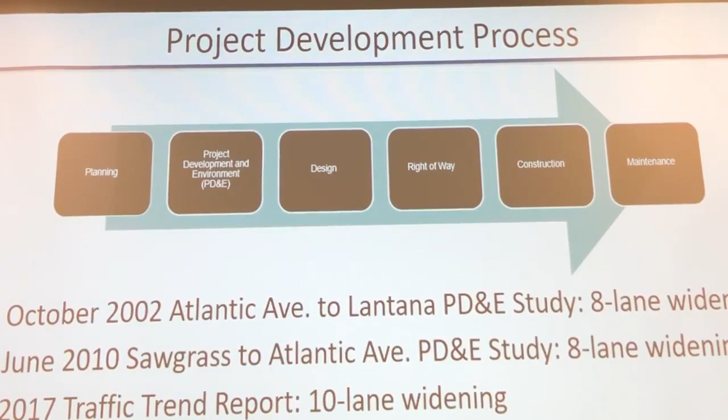And so we look at... Go in the corner. Everybody good? Does she need a chair? She's gonna sit, I'll sit on there. Right around. All right, there we go. All right, fantastic. All right.

So we start from a planning standpoint, looking at the needs that are out there and just even determining the feasibility of whether or not a project should go forth or not. Does it make sense or not? So there's different elements and components of that. Once the decision is made that we do think that this is an improvement that we do need to look at,

then we go to the next step, which is the project development and environmental process, which is a study that's actually done, and it's often titled PD&E. And some of you may have heard that terminology and not really understood what it means. So we're talking about developing the project and also looking at how is it going to impact the environment and how do we need to mitigate those impacts.

And there's a public involvement process during that PD&E study where we meet with stakeholders such as yourself, we talk about what we're considering, and then at the end of that come up with a preferred alternative. So this is what we're recommending that we want to build. So for the projects that we're going to discuss tonight, that process has actually already taken place.

And there's been 2 PD&E studies, one that was done in October, and that one was from Atlantic Avenue to Lantana, and that was actually for an 8-lane widening. And then in June of 2010, we did a study from Sawgrass to Atlantic Avenue, and again, that was for an 8-lane widening project.

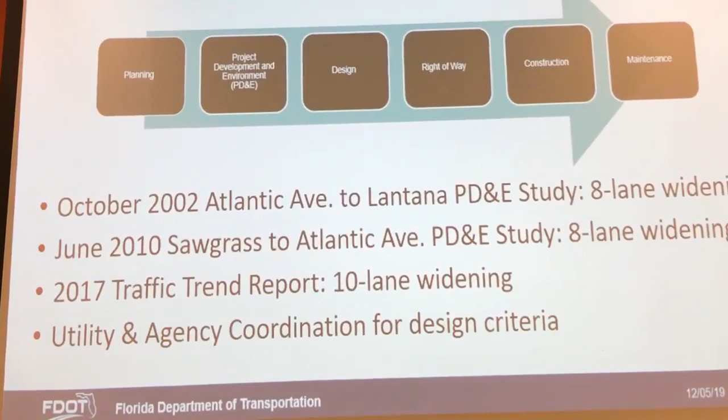After those projects were done, and as we were looking at how is the system growing, what are certain things that we need to do, we're looking at our traffic trends, and in a 2017 traffic trend report, that's when the Turnpike determined that we don't need to build an 8-lane, we actually need to build a 10-lane widening project, right? Because we don't want to get out there starting to build something and have to build something totally different than that project. So in 2017, that's when the decision was made to go from an 8-lane to a 10-lane widening.

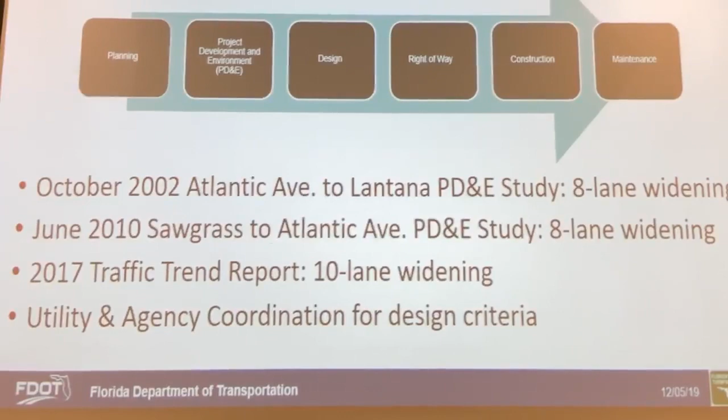And so you all might be asking the question, well, we're getting ready to enter 2020, how come you haven't been out there yet? And so what we've really been doing in the last couple of years is we've been talking with the utilities and agencies and coordinating with them, because I'm going to show you an existing typical section. There's a lot of constraints.

Lake Worth Drainage District is on the east and the west side. We've got AT&T. We've also got FGT that's running in there as well. And so a lot of different utilities and agencies that we need to coordinate with and really come up with the right design criteria. So that's kind of what has happened after the PD&E process.

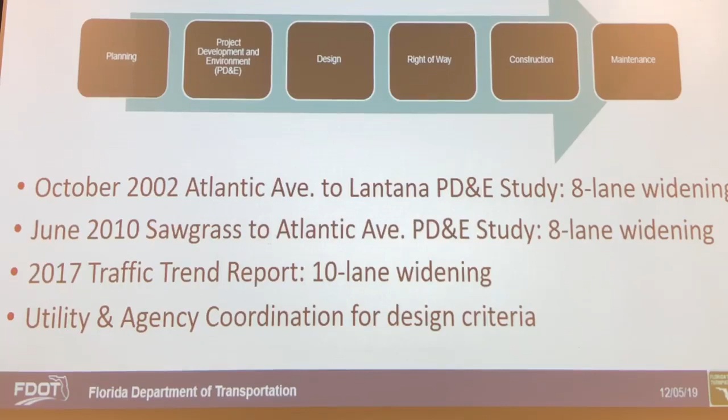So now where we are, after we get our study done, we've had the public hearing, we say, okay, this is what we want to build. We then go to the next step, which is design. We then nail down that final design criteria. We look at the criteria, we look at the constraints that we have, and how can we fit this 10-lane widening project within the right-of-way that the Turnpike has.

And as we're designing, then we determine, do we need more right-of-way or do we not need more right-of-way? And then all of that takes place. We have public meetings so that we let you all know if there's going to be right-of-way that needs to be acquired. And then after we get through the final design, we go through a bidding process. We select a construction contractor to build the project.

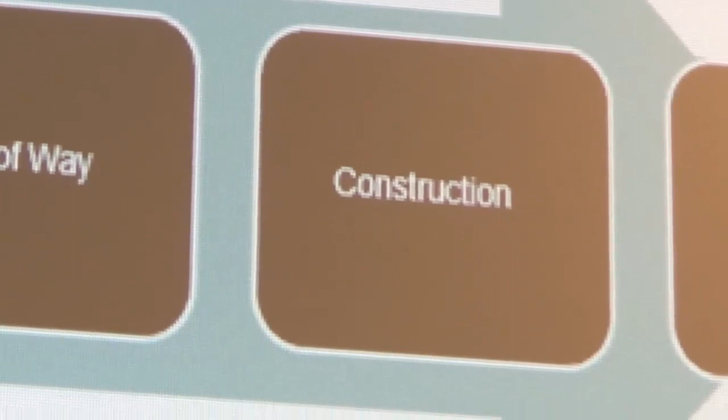Then we go through to construction. Sometimes it's a few months, sometimes it's multiple years. These projects that we're going to talk to you about tonight will be multiple years. And then after we've constructed everything, we then have to maintain the system, kind of like how we maintain our homes, we maintain our cars. That's the same thing that the Turnpike has to do as well.

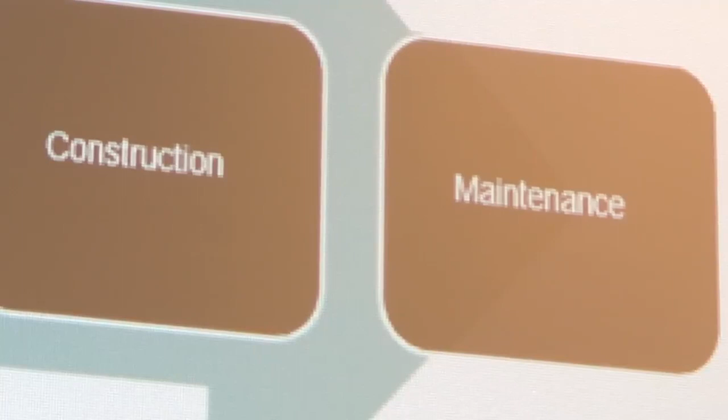So it's just not like, hey, we want to do this project. There's really a strenuous process that the DOT has to follow according to their policies and procedures, which is actually mandated by the law.

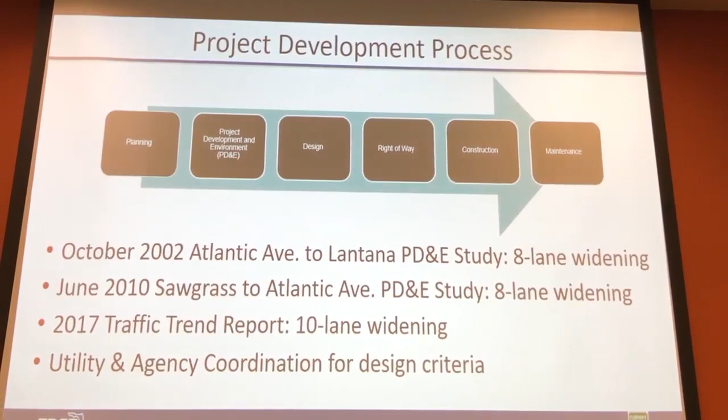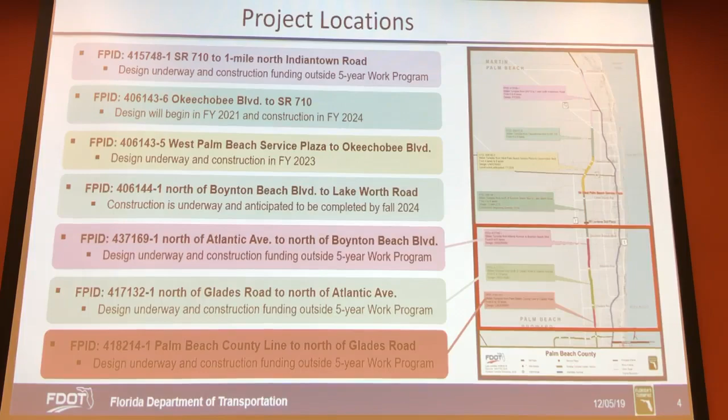And the funding for the construction is actually outside of our 5-year work program. So we've got money for design that we're currently using, and it's not to say that we don't have construction funding, but it's just not in our 5-year program that is actually published.

The next project is from Okeechobee Boulevard to State Road 710. And again, that design is going to begin in our fiscal year 21, which is calendar year 2020 and 21. So our fiscal year runs from July to June, okay? So when I'm telling you, we're talking fiscal, not calendar year, and then our construction for that, again, is gonna be in fiscal year 2024.

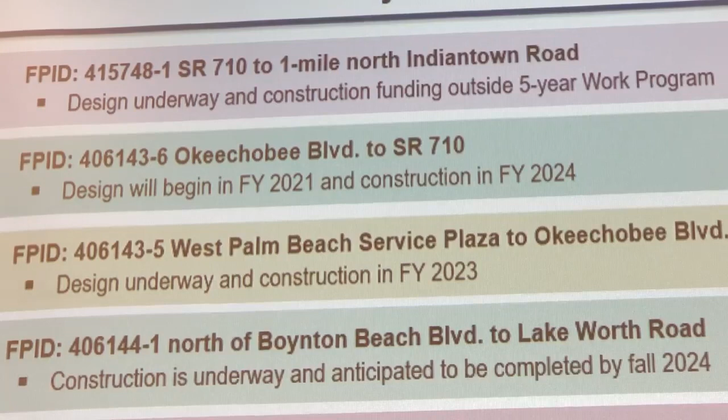Our next widening project is West Palm Beach Service Plaza to Okeechobee Boulevard, and that design is actually underway. And that construction is going to happen in fiscal year 2023, which will be calendar year 22-23. And then from there, we've got north of Boynton Beach to Lake Worth Road. That construction is actually underway and it's anticipated to be completed in the fall of 2024.

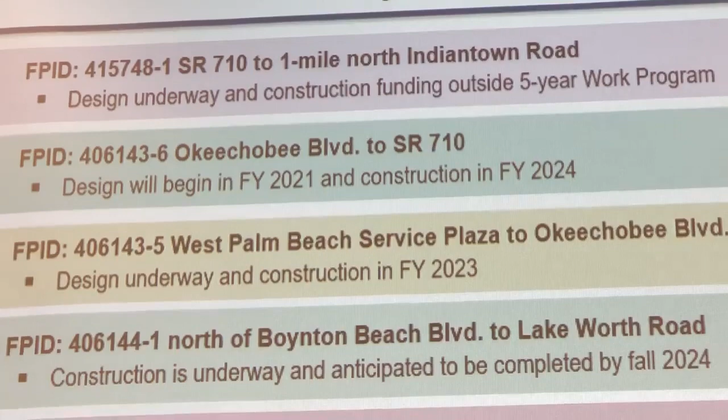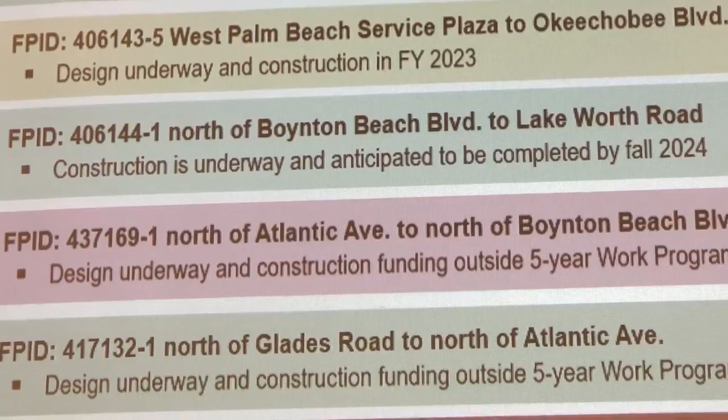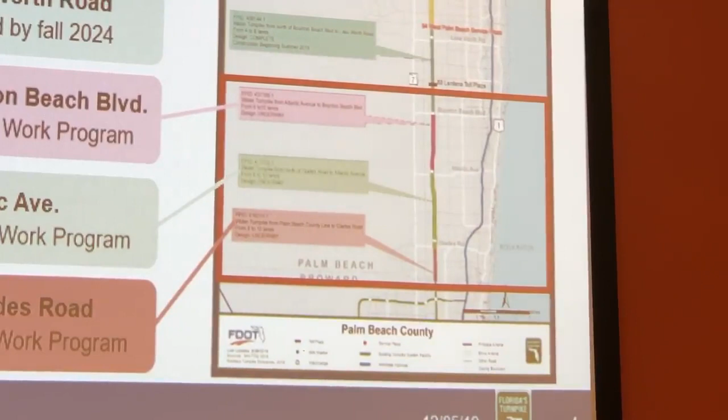And then we have from north of Atlantic Avenue to Boynton Beach Boulevard, that design is underway. Our construction funding is outside of the 5-year work program, which is going to be the same for the next 2 projects, which is basically from north of Glades Road to north of Atlantic Avenue, and then from the Palm Beach County line to Glades Road. And tonight we're going to focus on the last 3 projects that I've got highlighted here in the red box. So we're going to give you a little bit more information regarding the status of where those projects are.

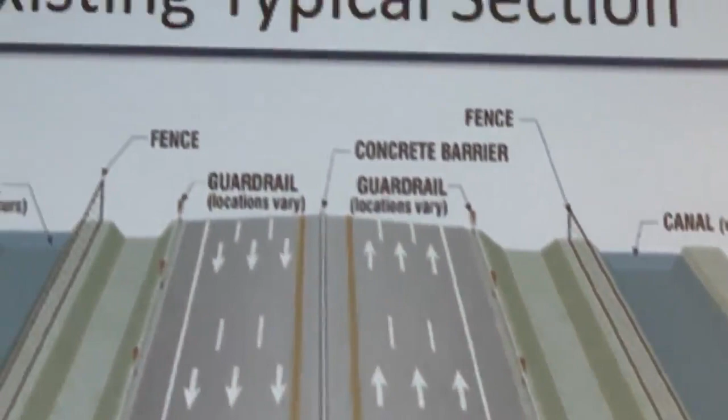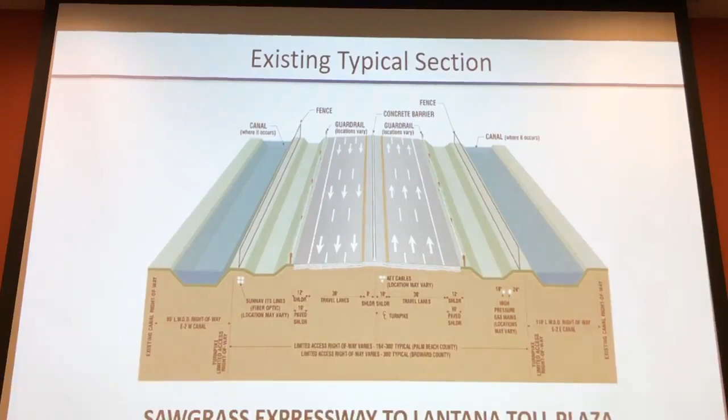So here this is what we call a typical section. So basically we're cutting the road in half and we're looking at it north, okay? And so this is showing the 6-lane widening that you all are very familiar with. And if you look, it shows the constraints that we have to work in, meaning the canal, Lake Worth Drainage District, both on the west and on the east side.

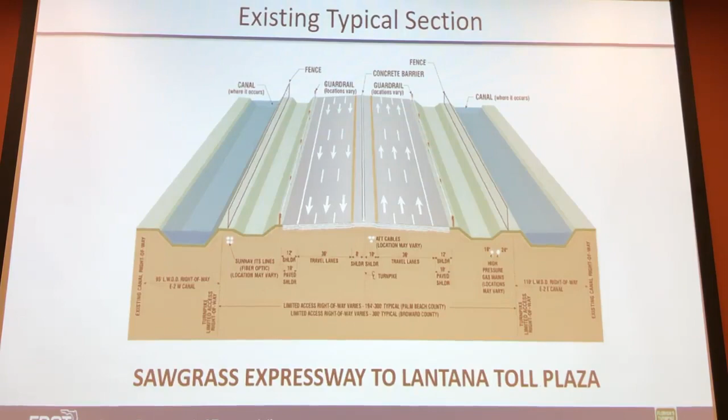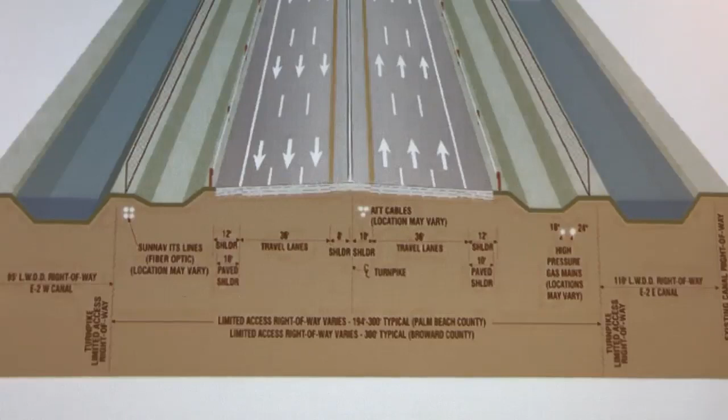We also have ITS, we have AT&T, and we have the Florida Gas Transmission. So FGT, which is an 18-inch and a 24-inch line. In order for you all to have the gas that you need, it's actually running on the east side of the Turnpike. And so we have to take all of this into consideration when we talk about how we are going to fit these additional lanes in that we're now saying that we need along the Turnpike.

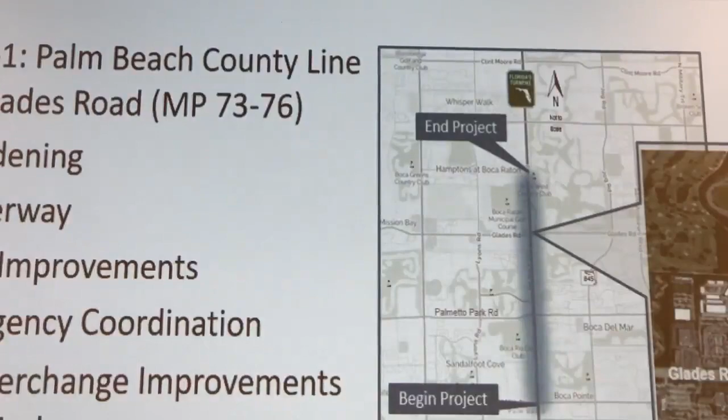All right, so I'm going to basically talk through each project. I'm going to start from the south and I'm going to work up, so those 3 projects that were in the red box that I showed you a few slides ago. The first project is FPID. So this is our financial project ID. So with the Turnpike, every project has to have a number so that we can keep track of funding and everything associated with the project.

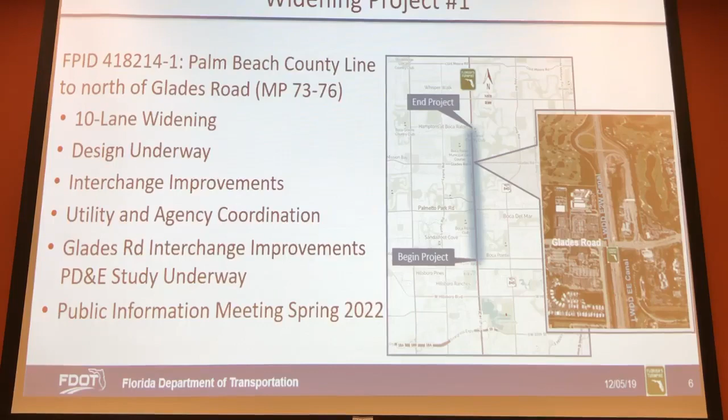And so from basically Palm Beach County line to north of Glades Road, that FPID is 418214-1. So again, we're doing a 10-lane widening, and that design is underway. And I'm the project manager for this project right here. So we did our consultant negotiations through the summer, and they've actually started the process of looking at how we can fit these 10 lanes within the constraints that we have.

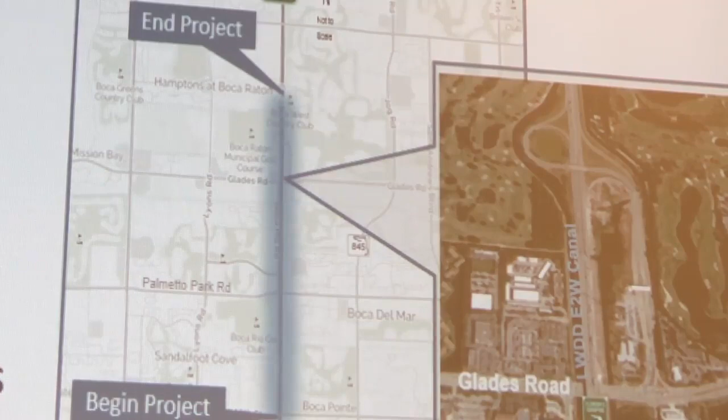There are going to be interchange improvements. And then we've started that utility coordination. So we've had multiple meetings with Lake Worth Drainage District, and we've had multiple meetings with the Florida Gas Transmission, to make sure that what we're proposing is acceptable to them, because we have to actually encroach into their right-of-way, and we may have to do some relocation of certain items in order for the project to happen. So we're talking about design criteria and trying to figure out the best way that we can get our project within the constraints that we have.

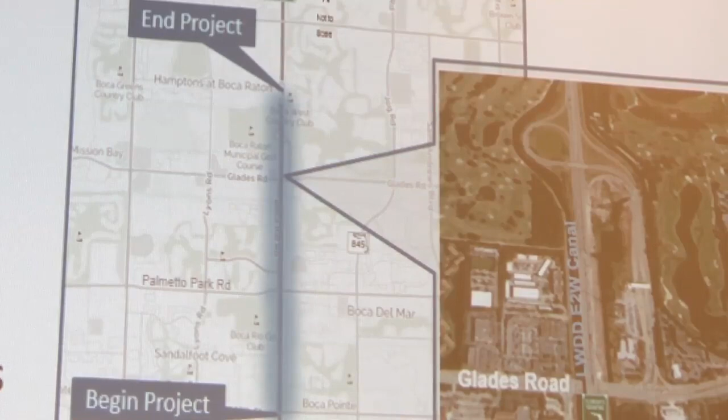A major interchange improvement, which hopefully you all will be excited about, is our Glades Road interchange, right? We know that it's very congested. And so actually the PD&E study, so remember that was the step 2 of the process that we talked about. The Glades Road interchange PD&E study has actually started in October, and that PD&E study is actually going to run concurrent with the design that is underway.

And so we're coordinating very closely with them, and then you all will be getting some information relative to the public. There's going to be a kind of a kickoff newsletter that's going to probably come out at the beginning of the year, and then we'll have a public workshop. So you all will very much have the opportunity to come in to see what solutions we are presenting as far as how we can make that interchange work better and help the traffic congestion that is there at the Glades Road.

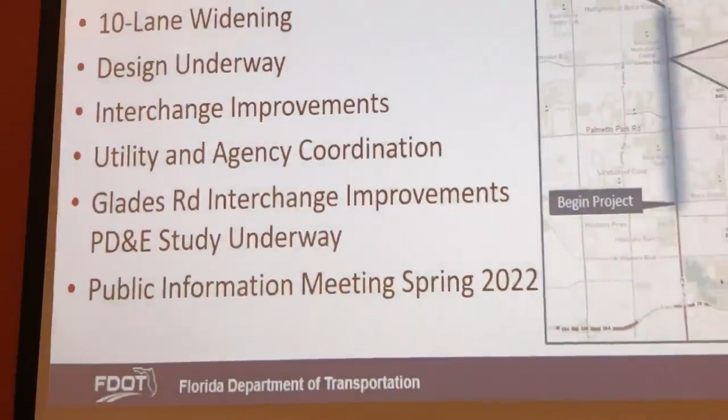And then for the Mainline widening project, there's a lot of things that are going on before the actual widening of the Turnpike. The design is going along, and that's going to take approximately 2 years. So we're thinking June of 2021. We then have to submit our plans to FGT, Lake Worth Drainage District, Palm Beach County, all of these different entities, and we've got to get concurrence on our plans that everyone's in agreement of, hey, this is what we're going to build. So that's going to take a couple of years to do that.

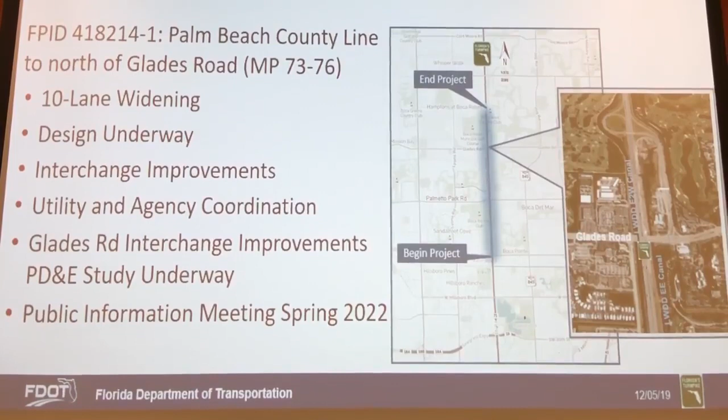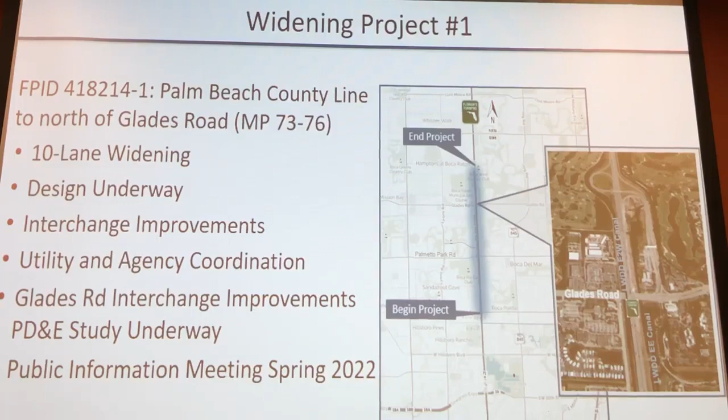And then we will start meeting with the public once we all agree that yes, this is the design that we feel is sufficient to meet the needs that are out there. And that public information meeting is tentatively, we're looking at spring of 2022. So we're talking 2 years before we would come to the public and present what our proposed design is for this portion of the project.

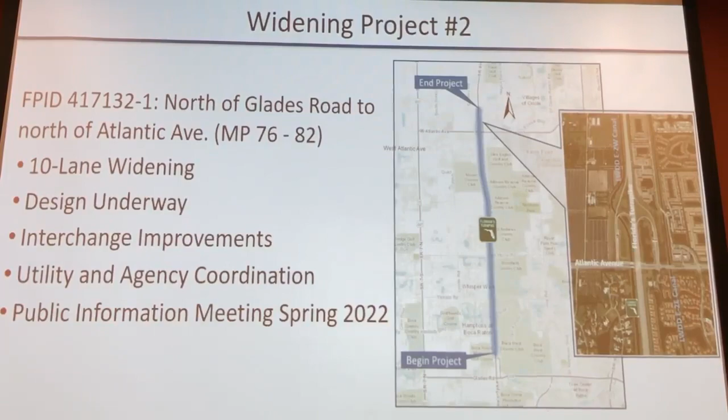There will be interchange improvements as far as the ramps are concerned at Atlantic Avenue. And then the utility and agency coordination has taken place, and we've really been talking about all of these projects with them at the same time. And then again, a public informational meeting is anticipated in the spring of 2022.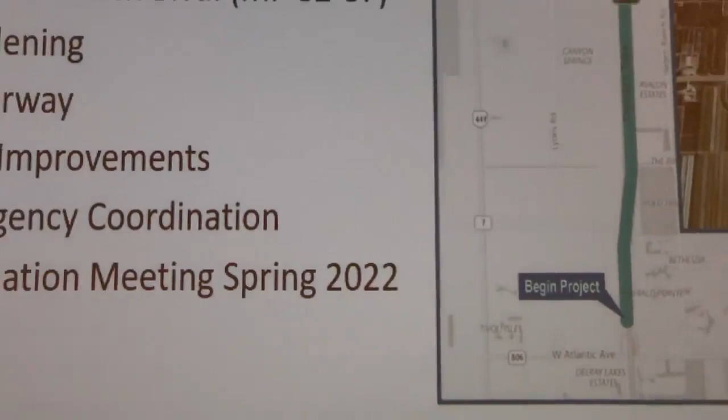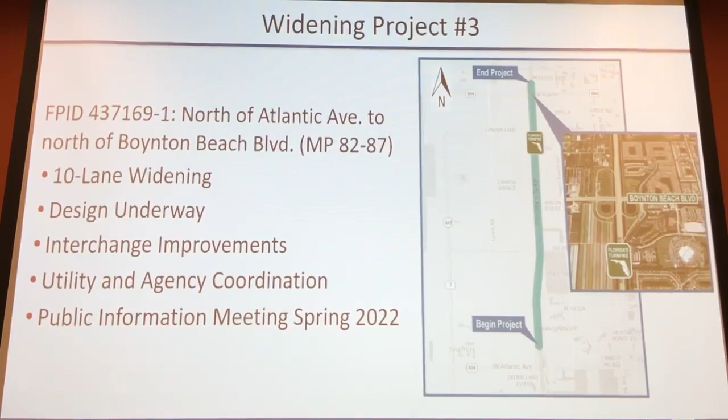Our last project is FPID 437169-1, and this is from north of Atlantic Avenue to north of Boynton Beach Boulevard. Again, it's going to be a 10-lane widening. The design is underway. There will be interchange improvements to the Boynton Beach Boulevard interchange to really help from a safety standpoint as far as the on and off ramps to the Turnpike at Boynton Beach Boulevard. And again, we have been coordinating with the utility and the agencies relative to this proposed project, and we're anticipating that a public informational meeting will be held in spring of 2022.

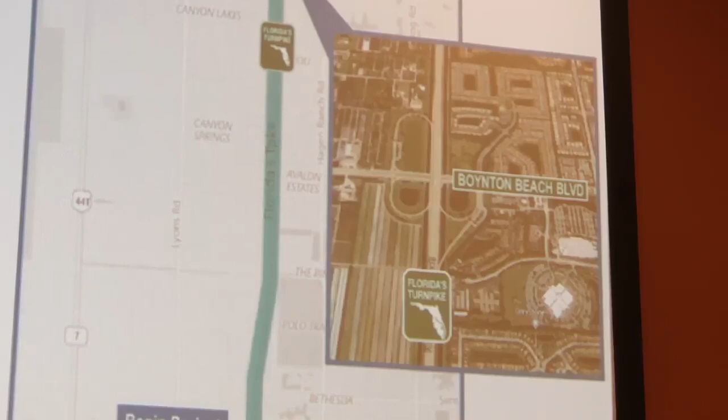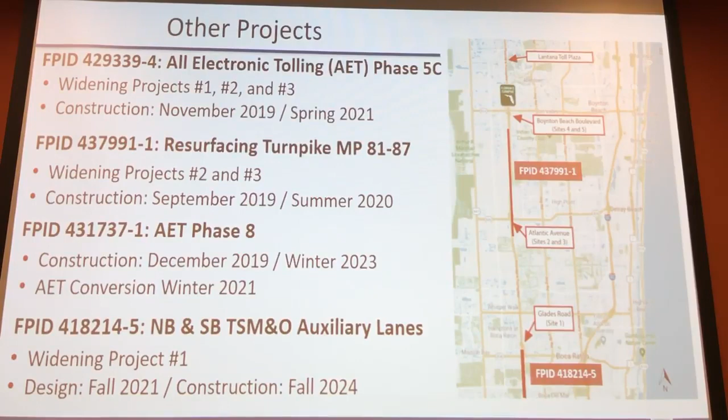So other projects that are happening within the corridor. So our all-electronic tolling project that is underway. This means that the Turnpike is getting to the point where cash will no longer be an option, but it'll be toll by plate. We're a toll by plate state. And doing all electronic tolling helps with the efficiency of how we can get traffic moving on and off of the Turnpike.

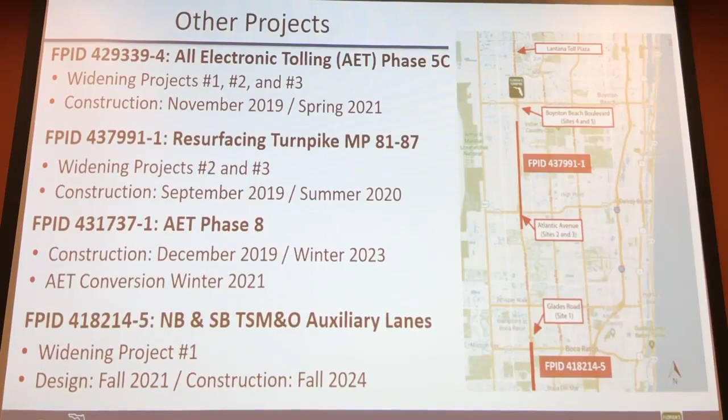And so that project is 429339-4, and it's 5C. And it is actually where you see it showing Atlantic Avenue, Boynton Beach Boulevard, Glades Road, where we're actually putting in those all electronic tolling systems in those locations. That construction actually started in November and is anticipated to end in spring of 2021.

We've had a resurfacing of the Turnpike, and that's from mileposts 81 to 87. And that construction began in the fall of this year, so you all have actually seen where we've done some resurfacing on the Turnpike, anticipating that it's going to end in summer of 2020. And if you guys can see that second big long red line, that's where that resurfacing project is.

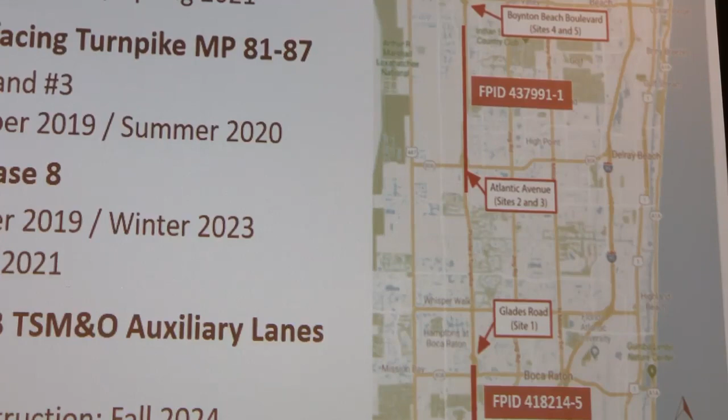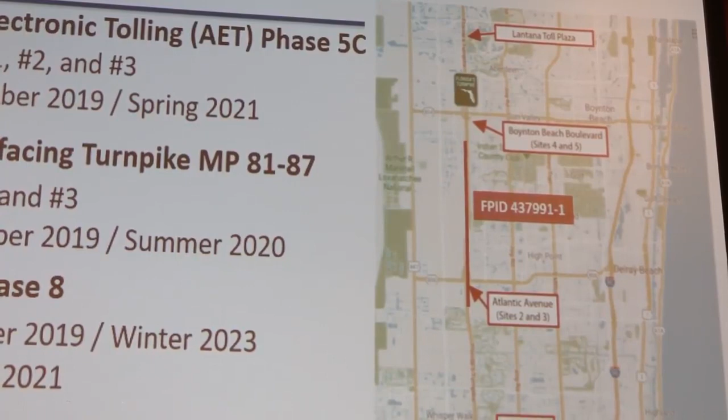And then our AET phase 8, that's the top part where the Lantana Toll Plaza and other areas identified. That project is going to be kicking off this month and going through the winter of 2023. And then what we call our all-electronic tolling conversion is going to actually happen in the winter of 2021. So that's when we will pretty much be a cashless system by 2021.

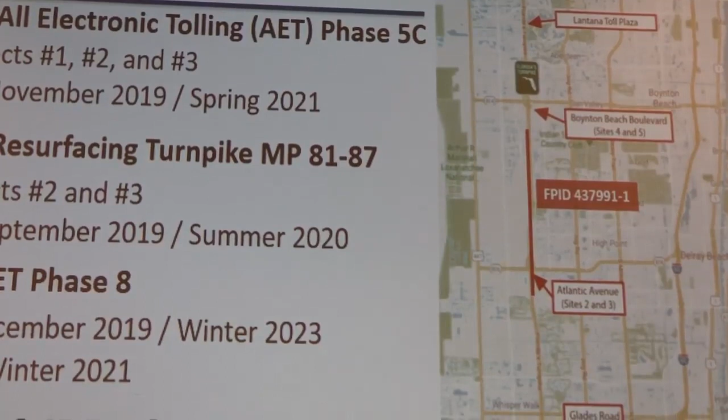And then some future projects that are coming up are what we're calling our transportation systems management and operation, adding auxiliary lanes. So we're going to actually add some capacity to the Turnpike before the widening projects come out, because as we stated, our construction is outside of our 5-year work program. And so in order to help move the traffic better, we've got the TSMO and auxiliary lanes, which will take place.

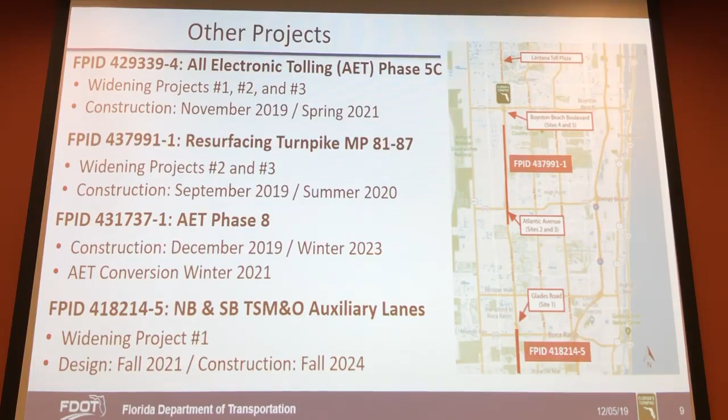We're going to start that design in the fall of 2021. And that's actually fiscal year, so it'll be fall of 2020 when we'll start that design, and then our construction will be anticipated to be completed in the fall of 2024. So that's kind of where we are from a design standpoint of the projects. And then Todd's going to come and talk about the noise modeling process.

Good evening. Before I talk about the noise that's specific to these projects, we have a noise video that explains the process that we'd like to show for you. There it goes.

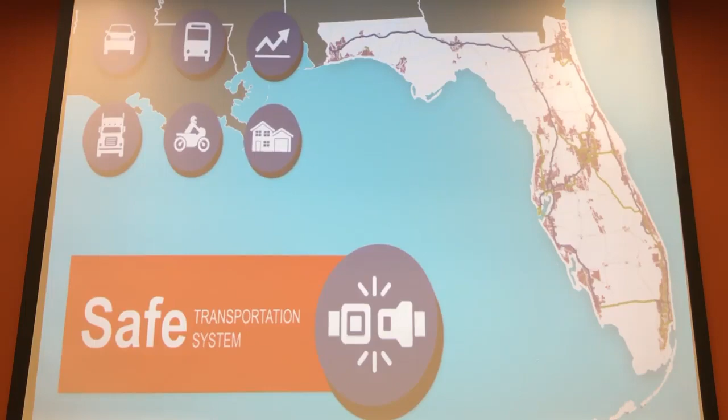Florida is one of the nation's fastest growing states, both in population and employment. People come here to live, work, and play. More businesses, visitors, and residents require a robust transportation system with enough capacity to easily move all those people and goods where they need to go. To do this, the Florida Department of Transportation, or FDOT, works to help meet the state's increasing transportation needs. We are committed to providing a safe transportation system that ensures the mobility of people and goods, enhances economic prosperity, and preserves the quality of our communities and environment. As we evaluate transportation options, we consider the noise impacts associated with growth.

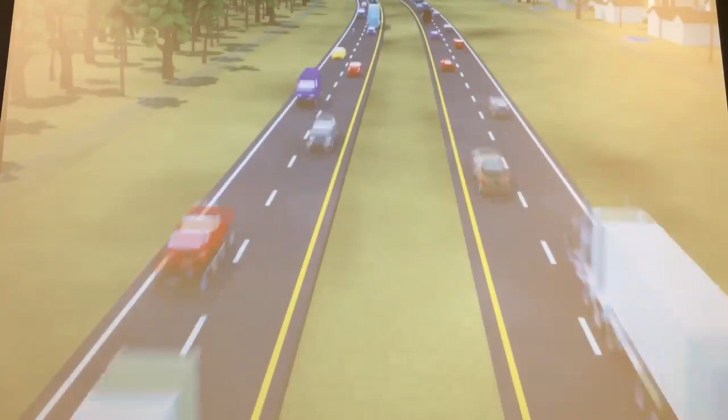When we study the impacts of noise, we use the same noise evaluation process for each project. There is a state and federally approved noise analysis approach that we use to determine impacts and whether noise walls are feasible and reasonable so that they meet the FDOT requirements. This evaluation helps determine if adding a noise wall would be an effective use of transportation funding. This process is used throughout all 50 states and usually starts during the early project development phase, well before construction. We conduct a noise study when we are building a new highway or making significant changes to an existing one, such as the addition of a new traffic lane or a major shift of the roadway alignment.

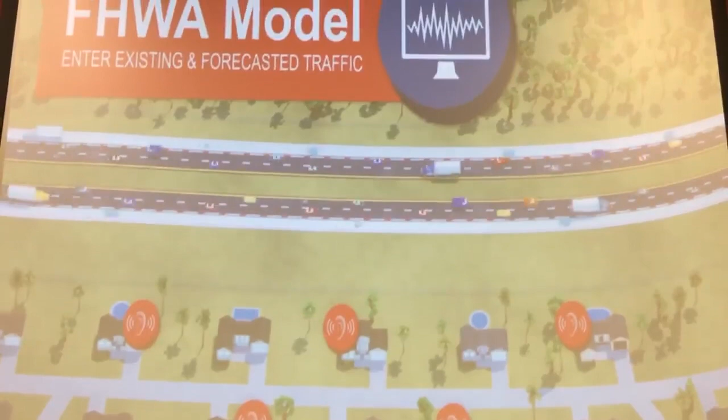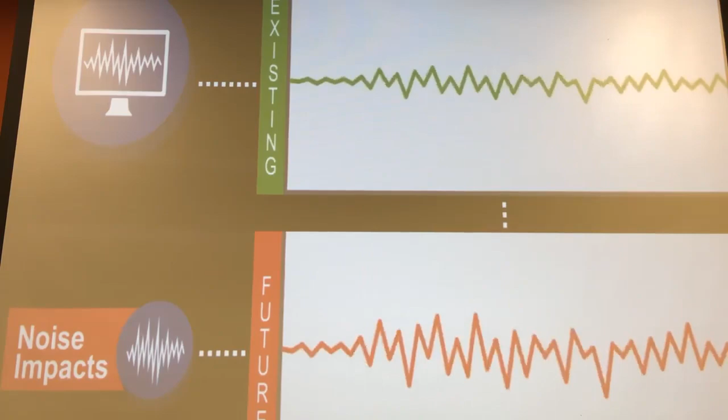During the noise analysis, we identify noise-sensitive areas closest to the roadway. Our traffic engineers predict future traffic volumes a project may add to the roads. We enter existing traffic and forecasted future traffic into the Federal Highway Administration's, or FHWA's, traffic noise model, along with natural and constructed features in the area. This model is used to determine what future noise levels may be in comparison to existing noise levels to calculate noise impacts. To accurately predict each project's traffic noise, we collect sample field measurements of existing noise to validate that the model is working accurately for each project.

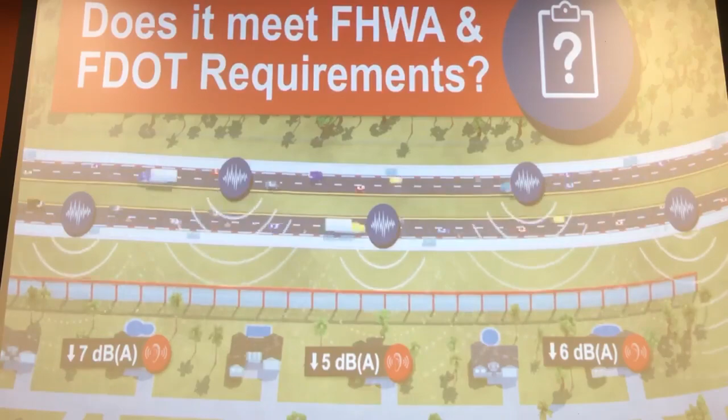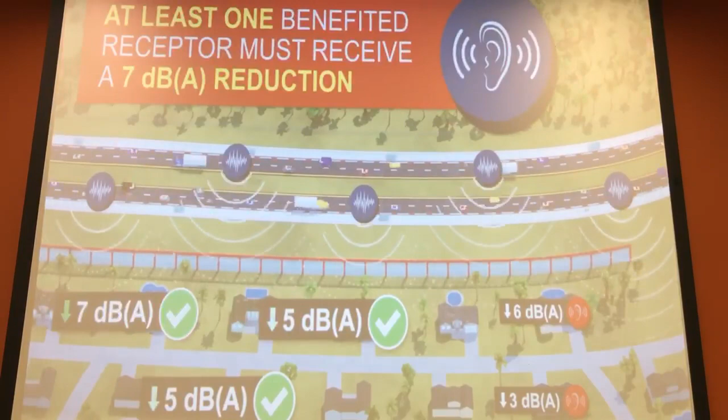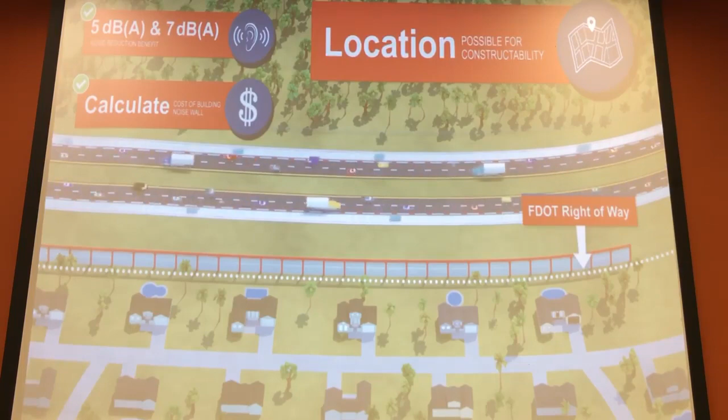When determining if a noise wall is a feasible and reasonable solution, we consider several variables. First, we evaluate if the noise wall will reduce future traffic noise for impacted areas. The governing standards for this determination is to achieve a benefit of a 5 decibel reduction for 2 impacted receptors and a 7 decibel reduction for 1 benefited receptor. Then we calculate the cost of building the noise wall per FDOT cost criteria. Next, we determine if it is possible to be constructed in the location that would provide the noise reduction benefit. Finally, we make sure that the property owners and residents actually want a noise wall. As you can see, there is a lot that goes into the decision to construct a noise wall.

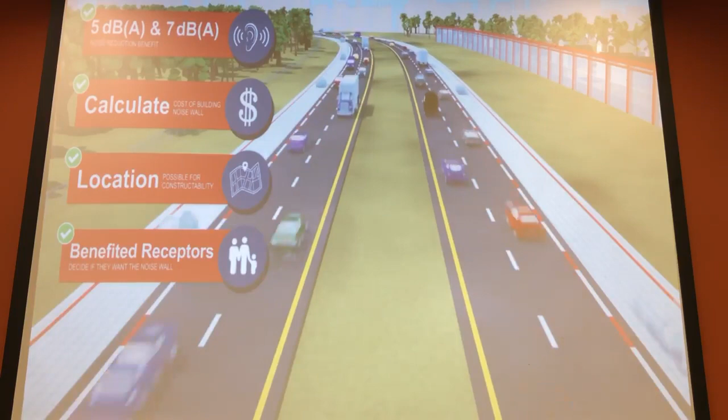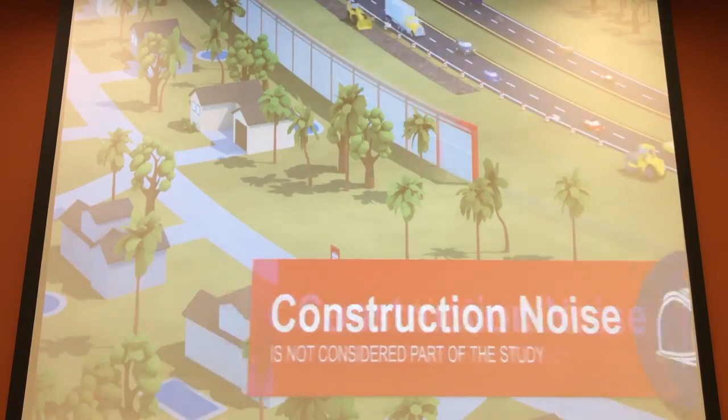A few things to note about this process. We know that large construction projects often are noisy, but in this process, construction noise is not considered as part of the noise study, only the noise resulting from the traffic of a completed highway project. Not all highway traffic noise goes away with the construction of a noise wall.

In fact, the biggest noise reduction is observed directly behind the wall. And finally, noise-sensitive land uses, such as homes, that are permitted for construction after the project development and environment study is approved, also known as the date of public knowledge, will not be considered in future phases of the project. By following this established policy, we are able to make fair and informed decisions regarding increased noise and seek balanced solutions that work for the community.

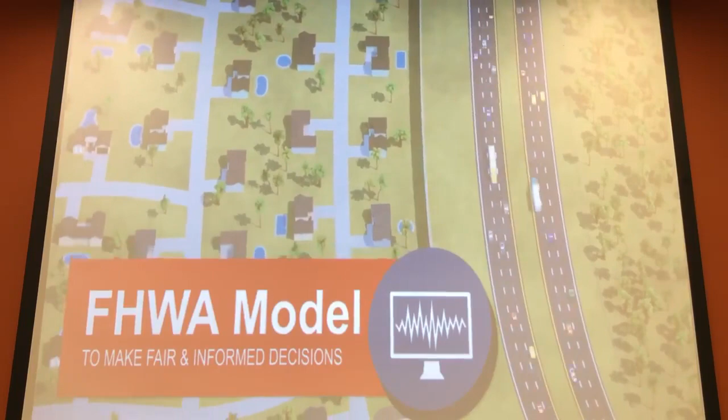As Florida continues to grow, we will work to reduce the sounds of growth and progress while continuing to preserve the quality of our environment and communities.

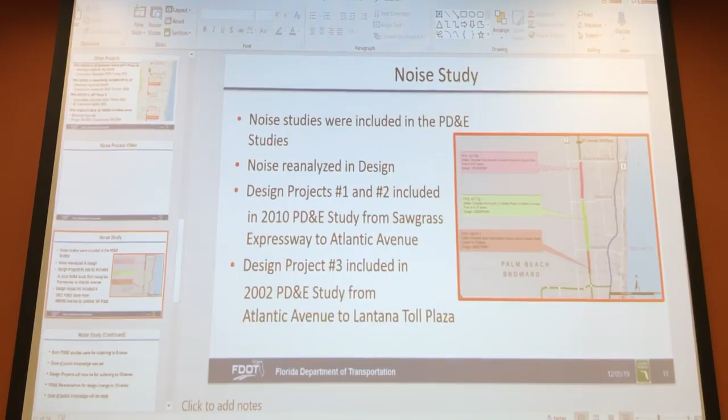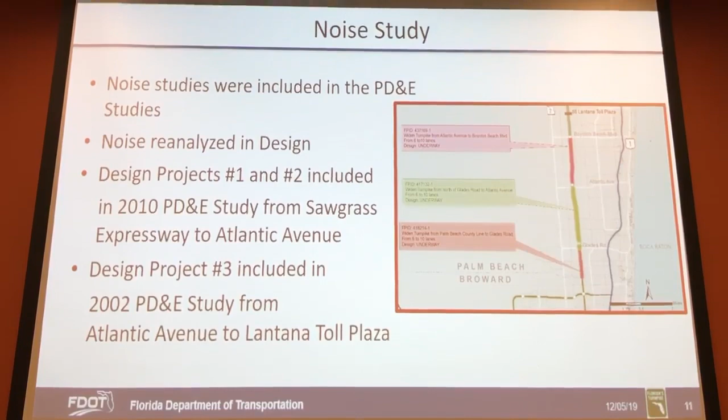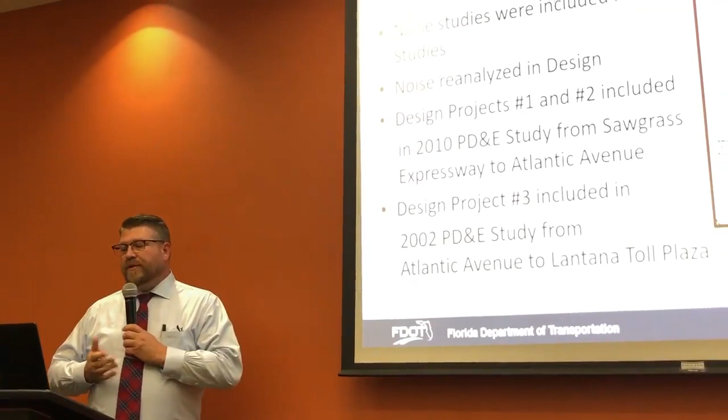Okay, so the noise studies were included during the PD&E studies that Teresa had mentioned earlier. Generally, after the PD&E study, noise is reevaluated during the design phase to make sure that when the design has come further along, the noise studies identified in the PD&E still work.

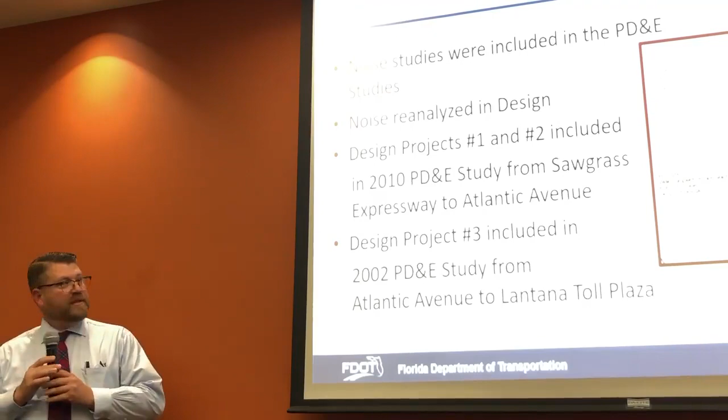So the design projects number 1 and 2 were the 2010 PD&E study from Sawgrass Expressway to Atlantic Avenue. The design project number 3 was the 2002 PD&E study from Atlantic Avenue to the Lantana Toll Plaza. Both PD&E studies were for the widening to 8 lanes.

So you can speak a little louder. Gotcha. So both of the PD&E studies were for widening to 8 lanes.

Now, as described in the noise video, normally at the end of the PD&E study, anybody that comes afterward is not included during the design phase. However, since this project is going to 10 lanes, we are going to reevaluate everybody that's there right now. So the date of public knowledge is basically going to be a reset. So when we reevaluate this project for the 10 lanes, we are going to look at everybody that's there now along the Turnpike up until the time that reevaluation is completed.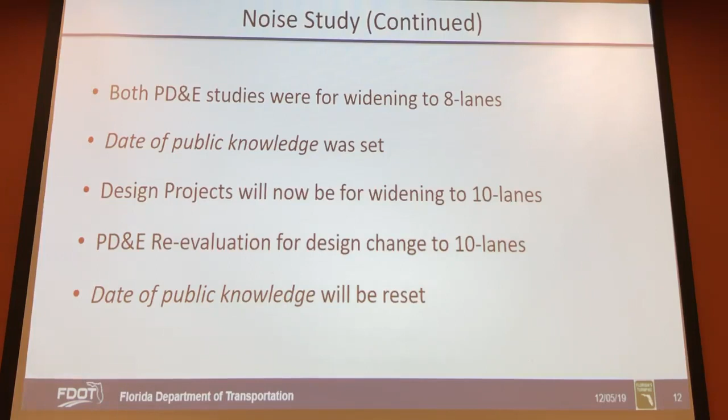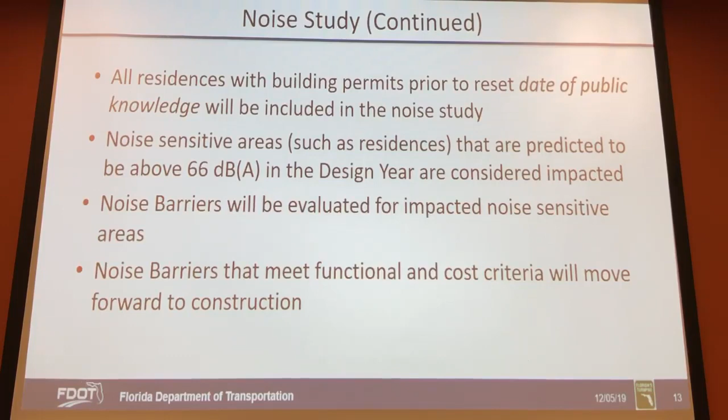So all residences that have building permits prior to this new reset date of public knowledge are going to be included in the noise study. Noise sensitive areas such as residences that are predicted to be above 66 decibels in the design year will be considered impacted. So noise barriers are going to be evaluated for all of those residences that are impacted. Noise barriers that meet functional and cost criteria as described in the video will move forward in the design to construction.

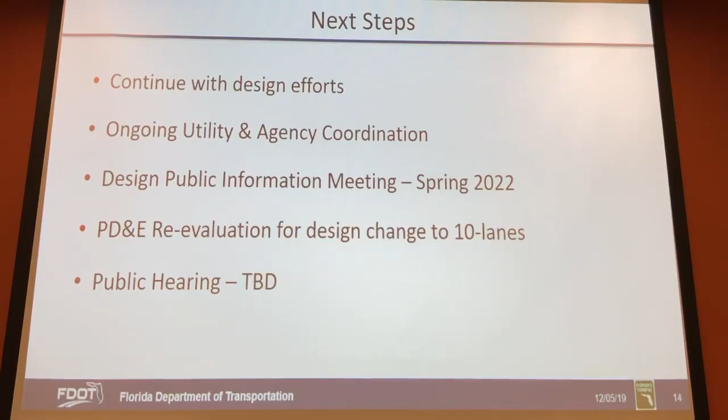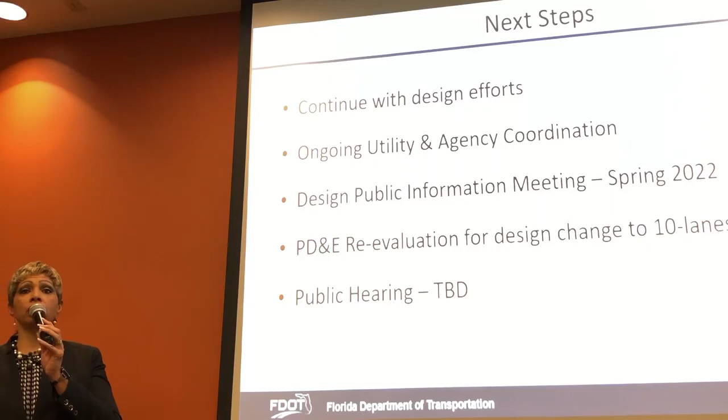So where are we at now? Our next steps, we're going to continue with our design efforts. Our design consultants are working, we're coordinating with the utilities and the agencies to actually get to an agreeable design for that 10-lane widening. Those coordination efforts are still underway, and then we will have our public informational meeting in spring of 2022. That's when you'll be able to see what we are proposing, because we can't show you anything yet because we haven't come to an agreement with the utilities.

I think you would be kind of upset if I showed you something tonight and then 2 years later I come back and say, I'm going to show you something different. And so we're going through that coordination process, and as soon as we get to an agreement, that's when we'll have our public informational meeting.

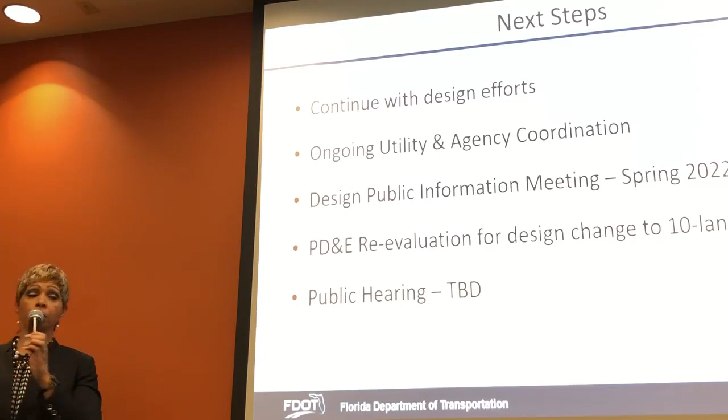We'll go through the PD&E reevaluation for the design changes to 10 lanes. That's when the reset date for the noise modeling will occur, and then we'll determine the noise walls that are going to be needed and constructed as a part of the project. And then our public hearing date will be determined, because we've got to get through all of this work first, see where everything is, and then we will determine a public hearing.

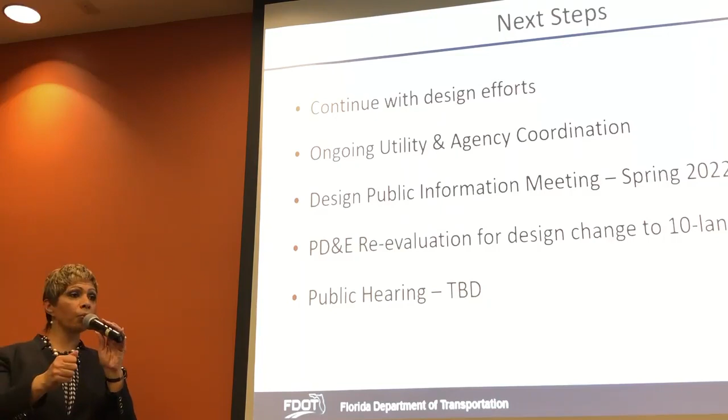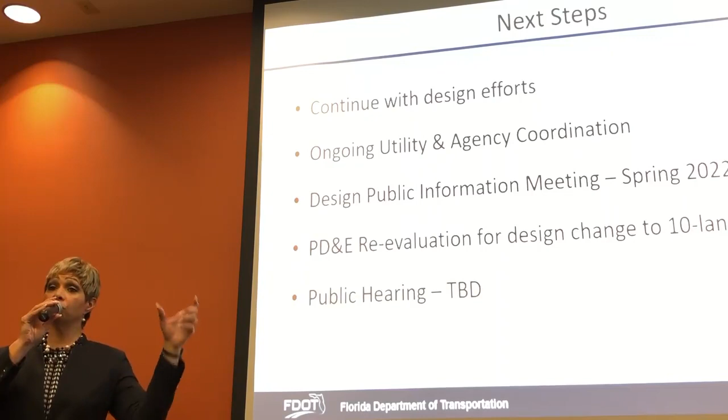And the public hearing is when you can actually record, yes, I'm for the project, no, I'm not for the project, and this is why I am, and this is why I am not. And it's actually where we're going on public record stating this is the project that we intend to construct. So you again will have another opportunity after the public informational meeting at the hearing, where we'll display everything.

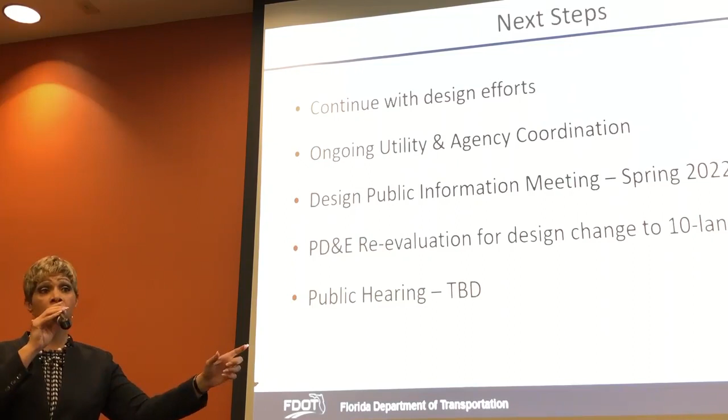We'll let you know if we're intending to acquire land or not, what those parcels are going to be. They'll be shown on displays. You'll have all of that information in order for you to determine, am I for this project or am I not for this project? And then you will be able to voice that opinion at the public hearing dates.

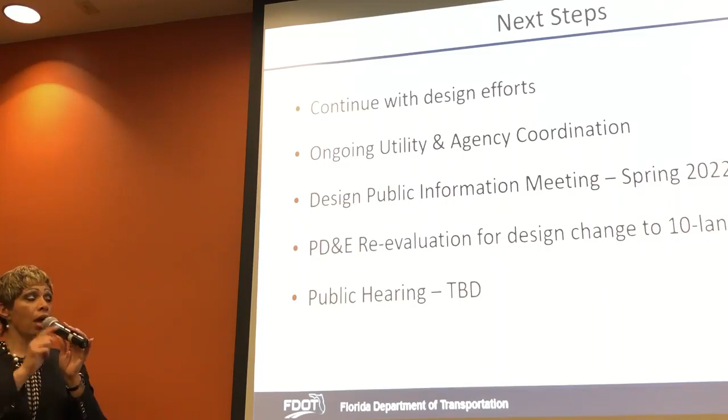So I'm Teresa Price, and I'm the project manager from Broward County line to north of Glades Road. So if you have any questions regarding that project, you can call me. And then Jasmine Alamani, she is the one that's responsible from north of Glades Road all the way up to North Boynton Beach Boulevard. So there's 2 separate projects. If you remember, we talked about 3 widening projects. And then for noise-specific questions, Todd is the expert. And so again, if you can't get a hold of Todd, you can get a hold of us and we'll track him down and tell him to give you a call back.

All right, well, no, he's not that kind of a guy. All right. Okay, I got you.

So let's be respectful. I promise you we're gonna get to everybody. So we're gonna hand you the mic. You can ask the question, all right? And then we'll do our best to answer. Yes, we can. If you cannot hear us without the mic, then we'll say it louder.

Hi. Can't hear you. I don't know if this is on. Hello. Close to the mouth. Let me start singing. I'd like to sing a song right now.